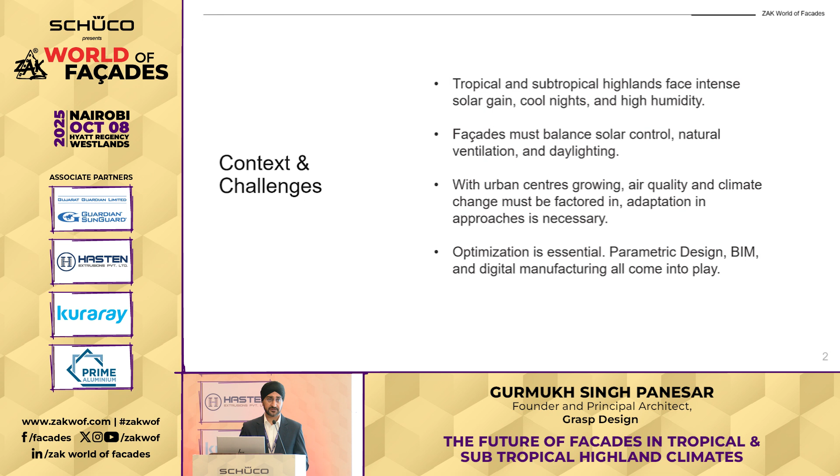In addition, climate change is another concern. We don't know what the impacts of that will be. Increased temperatures will mean some passive approaches may not work. We may need to introduce more active approaches, which contribute more towards climate change, so it's a vicious cycle. Lastly, optimization is essential - we need to use all the tools at our disposal: parametric design, BIM, and digital manufacturing to ensure we're doing efficient facade design.

Coming to self-shading forms and optimized shading geometry, let's go to the basics. If you're looking at a climate like Nairobi, you need your orientation east-west with your longer facades facing north and south. It's common sense - we're close to the equator, it works. In addition, you can introduce things like courtyards that provide some kind of self-shading, and these are some of the more basic principles that must be implemented.

Unfortunately, a lot of people don't implement this, and still have a lot of long facades facing west and east. Some of this is due to bad design, but some is also due to poor urban planning that has not really caught up or factored this in. A good example is on Westlands Road in Nairobi, just behind here - we have very linear plots, but the orientation is against what we're proposing, oriented along the north-south axis, and because of that you have longer facades facing east and west.

Now, because of some of these urban planning divisions in early years, I think this is now starting to affect high rises basically in the region.

Now, as you go more advanced in self-shading forms, you can have complex curvature that can be parametrically derived, and you can also have this in your fins as well. So optimization of sun shading devices, optimization of your brise soleil, and your fins as well.

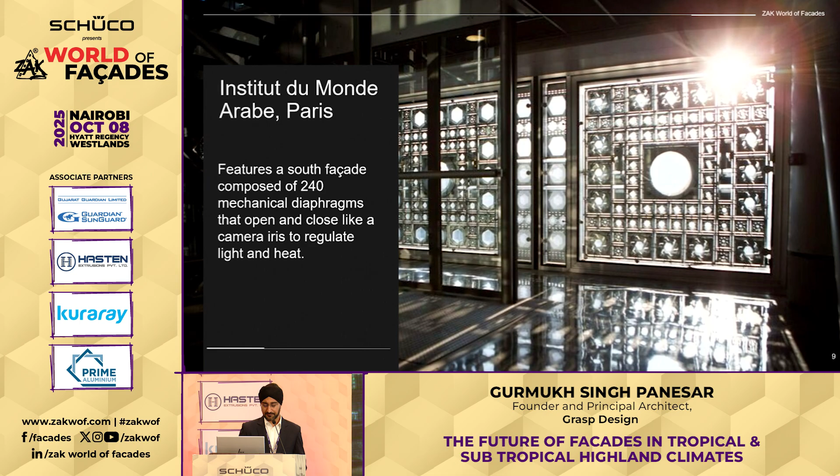Another example of dynamic systems is the Institut du Monde Arabe in Paris. This features an iris kind of approach, similar to what you have in digital cameras. If you see all the round apertures, they actually have an iris system that closes to let in light and regulate heat. This is a good example - there are two different systems. If you go back to the one in Al Bahr Towers, that's how it operates, with triangular kinds of open and closed settings in the facade.

The next item I'm covering is electrochromic and thermochromic glass. Between the two, I think electrochromic is more widely used. Thermochromic is quite niche. It's not used a lot for good reason, and I'll come back to that in a bit.

Basically, thermochromic glass tints based on ambient temperature, while electrochromic glass tints based on electrical charge. So it's a lot easier for you to control electrochromic glass than thermochromic glass. Also, thermochromic glass doesn't work very well for tropical climates. This is more suited for temperate regions, not for tropical climates.

The reason for this is because your ambient temperature tints the glass. If you had it in Nairobi, for instance, the glass would always be tinted because it's hitting 25, 26 degrees ambient temperature — your glass would always be in a tint state. And that would defeat the purpose.

However, in temperate regions, you have winter time where the ambient temperature is low, but you still want to let the sun in, and during summer you don't want to let the sun in either. So during winter, the glass tint is not on because the ambient temperature is low, but it still lets the sun in. During summer, the glass tints because the ambient temperature is higher, thus cutting out solar heat gain. So it works well for temperate regions. I wouldn't say it's very applicable for tropical regions.

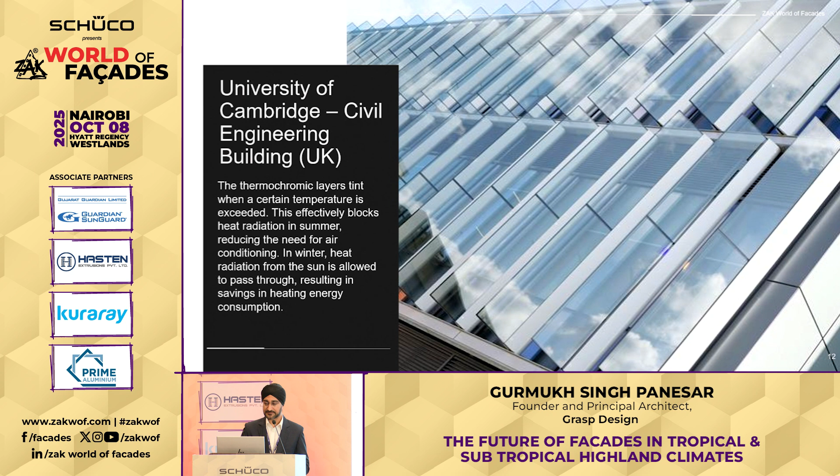Useful for temperate climates where you have winter and summer, but not so useful in tropical climates. So I want to also cover how we can integrate local context into this.

With the optimization of your facade items, your facade fins and brise soleil, you can integrate modern technology but with local craft, using locally derived materials like clay, timber, perforated metal, as much as possible, and obviously considering practical elements such as durability and UV exposure in this region being very high, you need to factor that in.

The other item I want to discuss is future outlook. What's next in terms of facade systems? You have things like algae-based facades, where your facades can generate energy. PV facades are already a thing, where you can have generation of power from your facades, with transparent or translucent photovoltaic panels on your facade, and AI-driven predictive facades with phase-changing materials.

That's obviously next level, but I think this covers what the future might look like, and I hope this has been useful. Again, for tropical regions such as ours, you have to be very careful about what to do in these facade implementation strategies. However, some key takeaways: start with the basics, get the orientation right, get your basic shading right, and then optimize further using design tools, parametric design, BIM, and you can use CNC fabrication as well to optimize material use. Thank you.

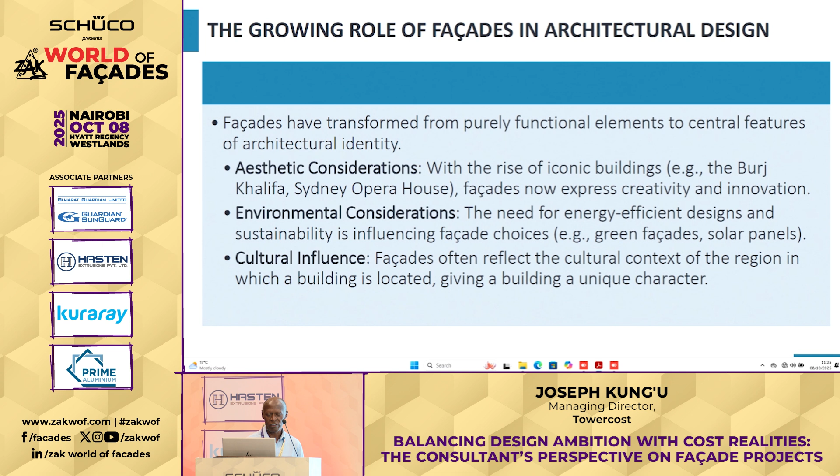When it comes to design, as Gurmukh mentioned, there are things like high-performance glass, smart facades, photovoltaic cells, thermochromic glass, and all these are part of the direction the evolving facade market is going. With that, aesthetic considerations come into place, environmental considerations become critical, and even cultural influence also becomes quite important in that regard.

When it comes to cost realities, you find that projects face intense pressures due to the increasing material cost.

We must be able to strike that balance, so that we make sure the developer, and even us as consultants, ensure the client is able to get value for what they're investing into. That's why material cost, whether aluminum, glass, or accessories, these are all important materials. You find that the capex involved in terms of imports and duties becomes quite prohibitive.

Recently there was also a duty introduced, which is making this kind of construction quite prohibitive. These are realities of the day that we need to see. How do we manage to give clients still a good product while being able to manage the costs associated with that?

It's a challenging environment, but I believe it's only those designers who are open to exploring other avenues who are going to be able to face these realities in a massive way.

Now, having said that, how do you balance the design ambition with the budget constraints? I believe that early stage decision-making becomes important.

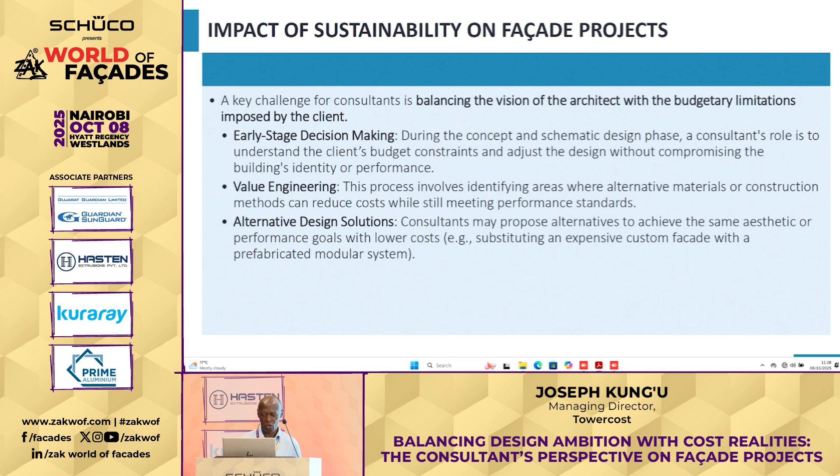How does that affect sustainability? That's why the element of design solutions and alternative solutions come into place, so we make sure the sustainability element is clearly addressed.

There is also a lot of green building technology coming into place. We have a few buildings right here in Nairobi whereby this kind of design has been carried out. It's becoming very attractive in terms of meeting sustainable requirements, but also improving the whole ecosystem and environmental element of the city.

These are technological innovations, whereby with advances in AI, robotics, and automation, it will lower the cost of custom facade systems and allow for more innovative designs at lower cost.

In terms of circular economy, we need to look at recycled and upcycled materials, which may become more common in facade systems as far as sustainability goals are concerned. The other element is collaborative approaches, whereby we increase collaboration to help manage both cost and design effectively.

So what are the takeaway points? Facades are both a design challenge and cost challenge in modern architecture. Technological innovation and sustainability are key drivers of both cost and design evolution. As consultants, we must be adept at balancing the client's budget with the architect's design vision, while also considering long-term performance and operational cost. And that is the end of my presentation.

Maybe I'll open it up in case there's any question someone might have in terms of how we can balance the cost and the design.

Any question? I think we'll do the Q&A at the networking lunch. Okay, thank you. Thanks. Okay.

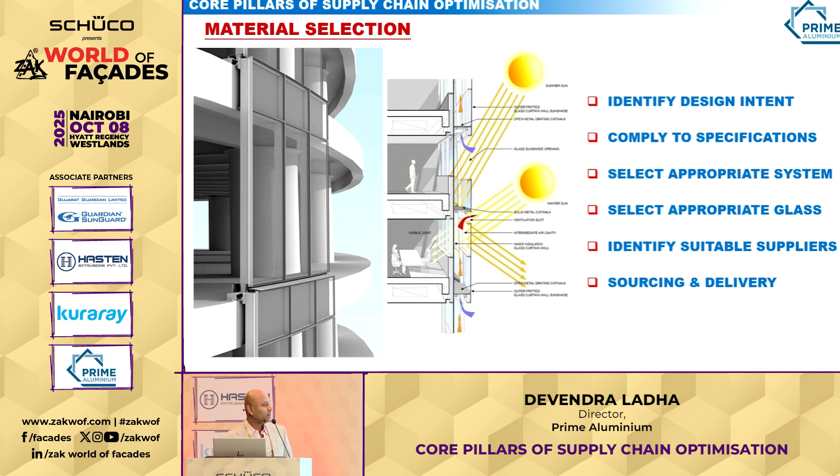So as you can see, for a facade project, there are so many different products and components involved that everything has to be sourced from all over the world. This is a typical example of the type of suppliers we work with and where they're globally based, and everything has to come together at the same time, and we have to be able to make sure that the right products are coming to the right quality, and they arrive to Kenya and East Africa, so we can do the installation for that. So this is a case study for Britam Tower.

We were the facade contractor for Britam Tower, which we handed over in 2018. And it was a complicated project. So we had to first understand the facade concept. So this is the facade concept. So what you have over here is you've got a facade which is a double skin facade.

So this is the concrete slab over here. And then there's a catwalk, it's a floor-to-floor glazing. And there's terracotta rain screen on the outside. So this is the floor-to-floor glazing, the openable vents, the maintenance platform, the terracotta rain screen, and the permanent ventilation. Now these are many, many different components coming together at the same time.

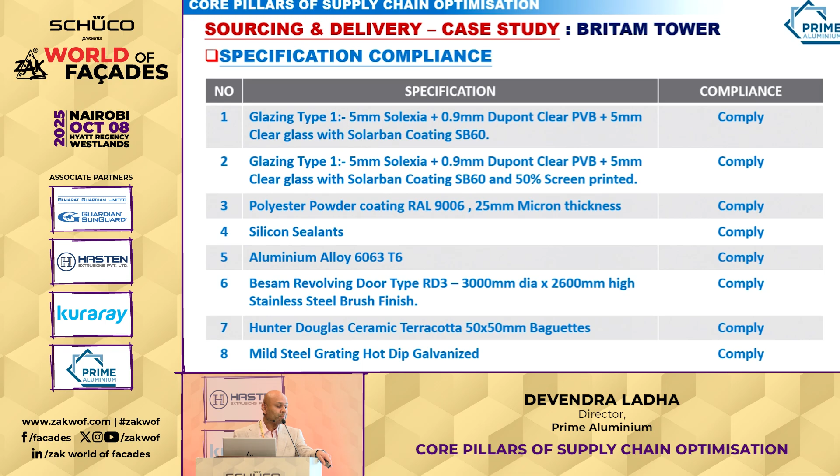And we also have to comply to the specifications. So there was the specifications that were set out by the facade specifier, certain type of glazing, certain type of powder coating, certain type of alloy and the temper, and the terracotta rain screen was a Hunter Douglas product. There was also grating, which was a catwalk. And what we have to do is we have to comply to the specification. At the same time, the facade had a performance requirement.

There was air infiltration, water penetration, wind resistance - all these performance requirements. So we have to make sure we select a system that complies with all of this, and we have to identify the right suppliers.

The project overview had curtain walling, so we identified the system supplier for the curtain wall part. You've got the doors and windows in the facade, so we identified the system supplier, and the steel work - in our factory we made all the steel work, I-beams, and because it's a secondary facade there's a catwalk. Then there's terracotta, so we worked with the Hunter Douglas product for that.

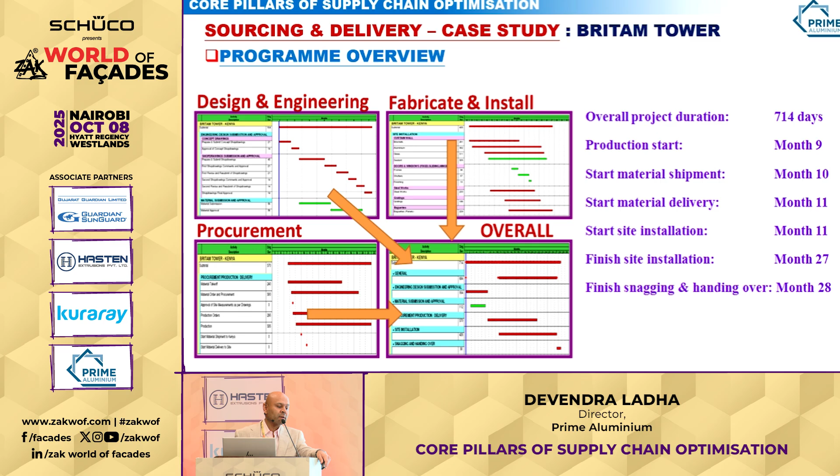All of these items then have to come into the overall program. There's a design and engineering element, a procurement element, a fabrication element - all of those come into the overall program, and we have to make sure the sequence of procuring all these items comes at the right time and the right interval so we can do the facade installation.

In the end, once the project was executed, we got a very beautiful facade. That landmark project has to withstand the wind loads and everything, and we identified the right systems to comply with the requirements.

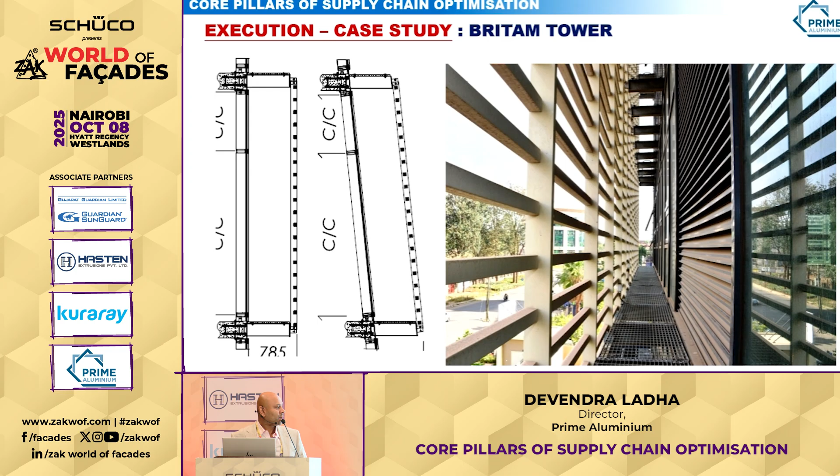What makes a high performance facade? What are the key characteristics? I'm from the facade contracting background, so I'll give my perspective on what I consider to be the key characteristics of a high performance facade.

I would say it should be energy efficient, with high energy efficiency, durable to weather resistance, provide indoor thermal comfort for the occupant, structural durability, and has to be sustainable obviously. In Nairobi we now do have a problem where facades and windows need to be acoustically well designed because noise is becoming a problem in Nairobi, and obviously they have to be aesthetically appealing.

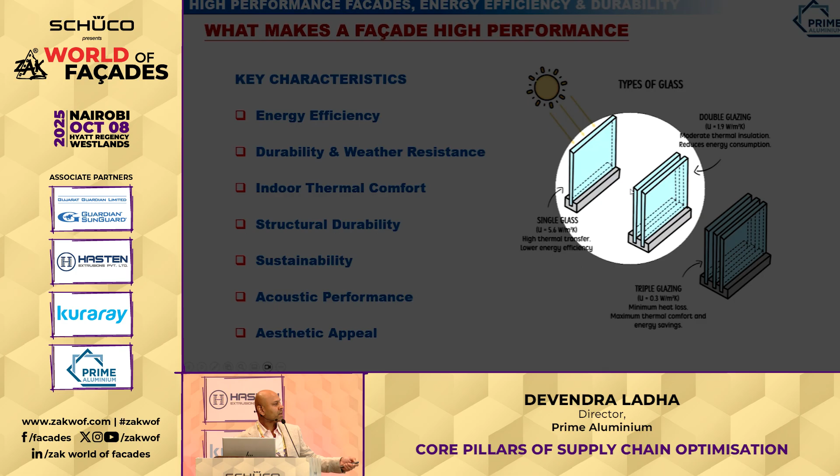Also for energy efficiency, there are various ways of doing it, but the most simplistic way is - you've got the outside sunlight coming into the building, so you can use single glass, or double glazing which is two layers of glass, or not so common in our market, for extreme climates you've got triple glazing as well. Generally in Nairobi, between single and double glazing, most projects are based on this type of glazing selection.

Then also the right system, a durable system, has to be selected in terms of performance, in terms of the hardwares, and making sure the right components are used to ensure long-term durability and functionality.

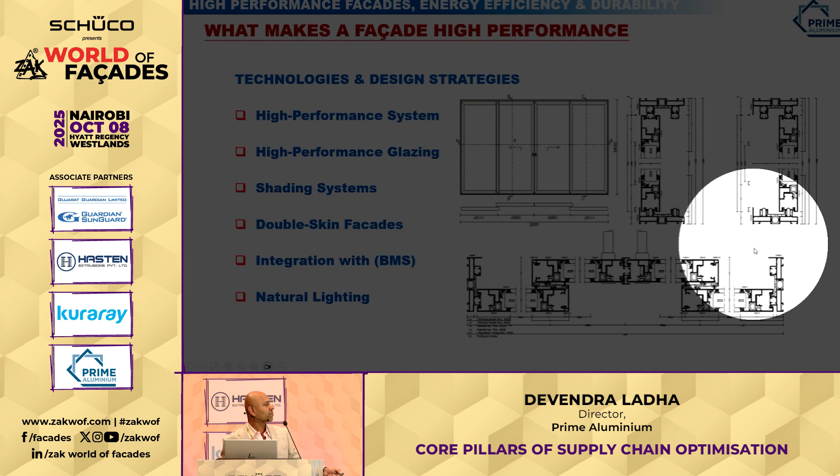Another thing is selecting high-performance systems. So this is the sliding door - I think this is a Schüco sliding door for a project that we did. You've got the larger width and height, and we selected a system that can have smooth operation for that. So this is a 4-panel sliding door, and this is a cross-section diagram for that.

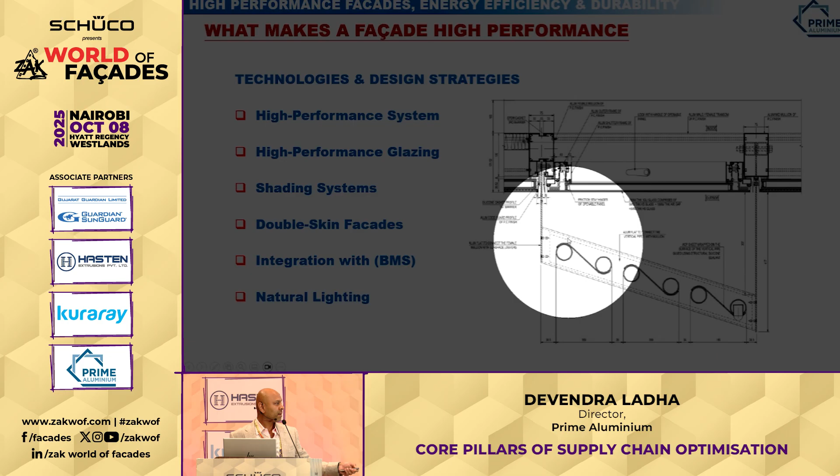These are the 3D analysis for that project, and this is the typical detail. What we've got is a unitized curtain wall system with sun shading cantilevered from the end of the curtain wall mullion, sticking out like this. In this slide, you can see how it projects out, giving higher performance to the facade as well as aesthetic appeal.

Another way to make the facade high performance is using good natural lighting. You can see in this project there's very good natural lighting coming into the building. Being in Nairobi, on the equator, making use of natural light is very good to do.

Now the next topic I was talking about was price versus performance and striking the right balance. One thing we've struggled with - and I'm happy QS Kungu said the days of doing square meter pricing have gone, I was going to give a round of applause at that point - is that nowadays we've got software that can build your facade.

These softwares calculate the amount of material required, and from the software you get all your material lists. You can play around with different types of systems, connections, fabrication data, and you've also got CNC machines that connect to the software to give you proper fabrication.

What these softwares let you do is build your own facade onto the system, and from that you can play around with the pricing. You can see here, you've got a facade that is X by Y in width and height. You've got the same one, but here you've got two openable panels and a double hinge door below.

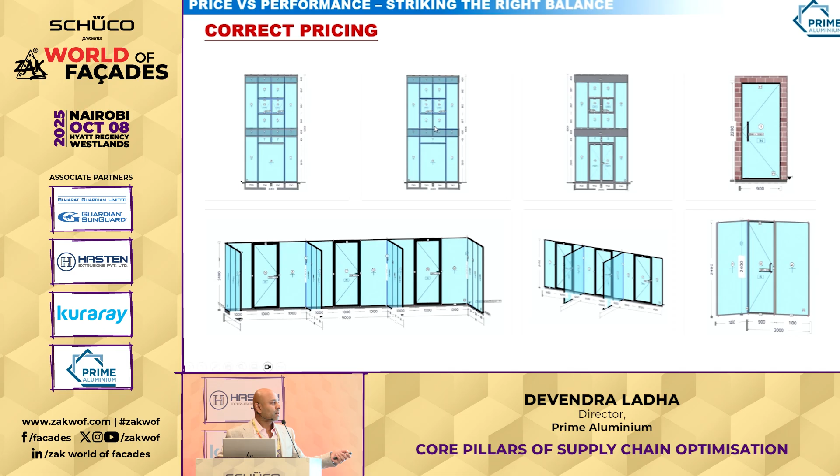One mistake that's been happening in the East African market is pricing by square meter - if you go on a square meter basis, it will be the same price. But because there's a hinge door, the price has to increase logically, since there's more hardware going in. Using these softwares to build facade systems and price the estimation correctly is the right way of doing it.

This is an example of the Schüco system, where for instance you've got a casement window or a sliding window. If you go to Schüco and want a casement window, they have 8 or 9 different options. All these different systems are of a different category, and all of them are priced differently.

When it comes to project specification, if you're working with Schüco, the system has to be selected and then priced accordingly. This is a good platform for architects and cost managers in this audience to connect with Schüco and see the different systems available, and the difference in quality and performance. So that's how the software works - we use it to price correctly.

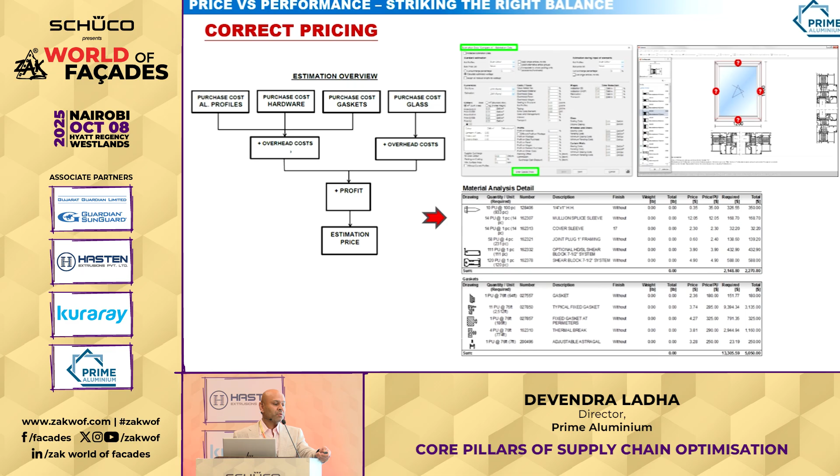We do an estimation - we take the purchase price of the aluminium, the purchase cost of the hardware, the gaskets and the glass. It goes into the overhead costs and the estimation price, which you feed into the user interface. You build the window on the software, as per the previous elevation I was showing, and it does a material analysis like this. All the prices come out, and you get pricing based on that - that's the correct way of pricing.

Now the next thing I was going to talk about was key stakeholders and their roles in a project. Every construction project has the owner, the consultants, the construction workers, and the contractors. We are a facade contractor - we fall in this category as a subcontractor.

So I wanted to explain the key stakeholders we work with in this position. First of all, there's a system supplier - a right system has to be selected. For example, Schüco is here, they're a system supplier.

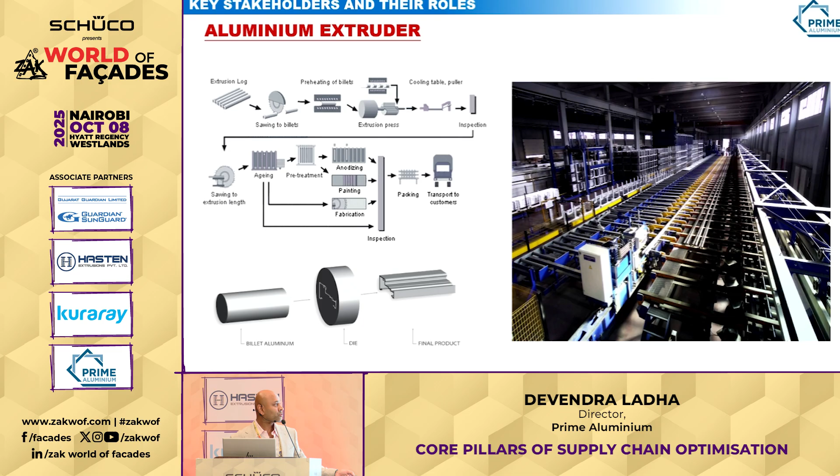Architects can approach Schüco and say, okay, which system do you want, sliding system, folding system? They will provide you with the hardware, the aluminum, the certification, the testing. Also, if there's a specific type of handles, they will be able to offer that. And then the next item is the aluminum extruder.

The aluminum extruder has a setup like this. The raw aluminum comes in, gets cut, goes into the extrusion process, the painting process, the anodizing process. So basically the raw aluminum goes through a die and out comes the aluminum. That's the extrusion process.

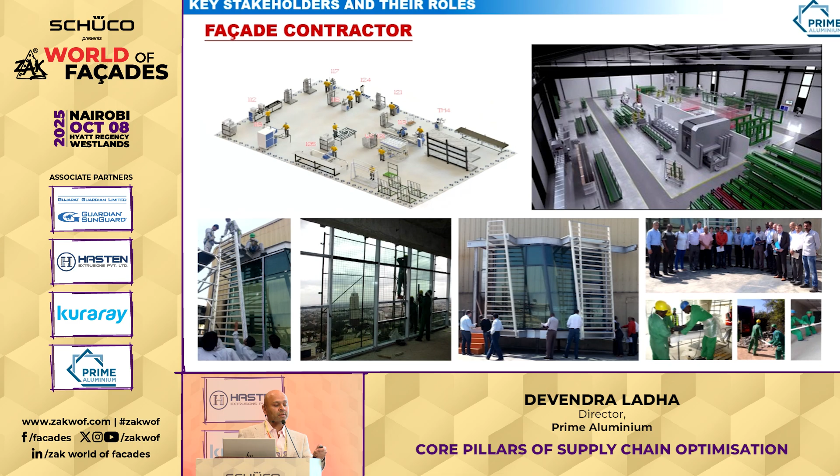That glass then goes to the glass processing companies, so the cutting, the laminating, the double glazing happens at this stage. Then finally comes the facade contractor, which is where Prime Aluminium comes into the picture. A typical facade contractor will have a factory setup with different machinery like this. This is a very modern factory, probably not in Kenya, but I'm sure it's somewhere else. Then we do the fabrication, take the material to site, do the installation, and that's basically what the facade contractor does.

So the facade contractor, from the whole collective stakeholder group, we are the ones who do the dirty work. And that's where we come in. Thank you.

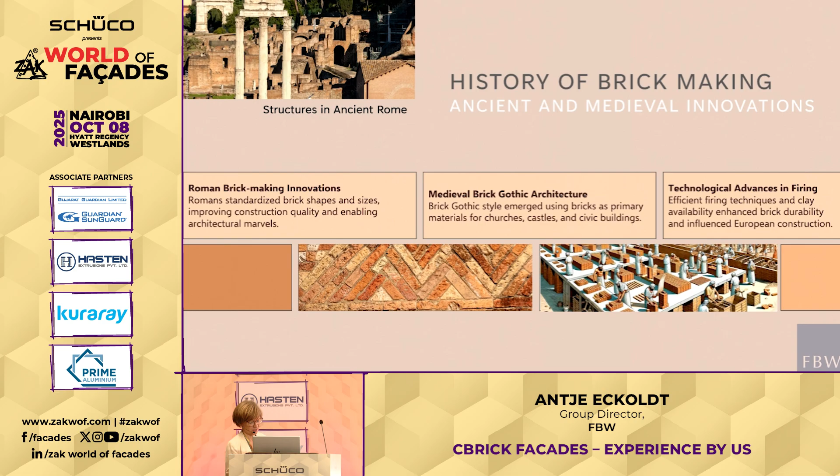So as you can see in the bottom picture, they also created a very distinct workflow just because of this huge demand for brick needed for their full empire. Medieval Gothic brick architecture brings the brick to the forefront, so for the first time bricks are actually being used as the facade. And obviously through time the process was improved and the quality was improved.

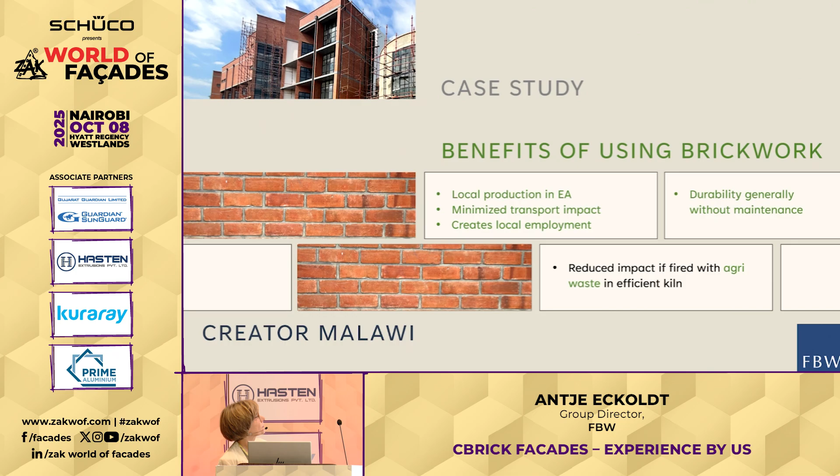So the facade we created — a bit of background — the project was originally designed in the UK, and the client is the Wellcome Trust from Liverpool. This is a medical research facility. As much as in Europe brick facades on multi-story buildings are commonplace, they are not as much in East Africa, so we had to translate the requirements of stability, durability, and structural integrity with a local contractor and locally supplied material.

So why did we choose, in this case, a double skin facade with a cavity? It's actually better practice to have a double skin on your brick because it allows the brick to dry out faster, and the bloom you can sometimes get on the surface is reduced because the facade dries out and is more ventilated.

As much as we specified all the products you can get in the UK — all the anchors, wall ties, the shelf angle — the contractor chose to go their own way, and down there you can see the wall ties and shelf angle they created. It's been interesting, but to summarize our experience, it's good to say we had already designed in the supports at each level.

So it was making a lot of sense to include in the master plan that we will create employment through a material which can be found on site and which will then develop the hill and actually be in line with the pillars I've just explained.

So circularity, I think everybody talks about it. Brick is really a circular material. You start with the manufacturing, you obviously use it in construction, then as you disassemble it, it will then afterwards either be reused or it returns to soil, and then the whole circle starts again. So there is no real waste product, anything which is not natural.

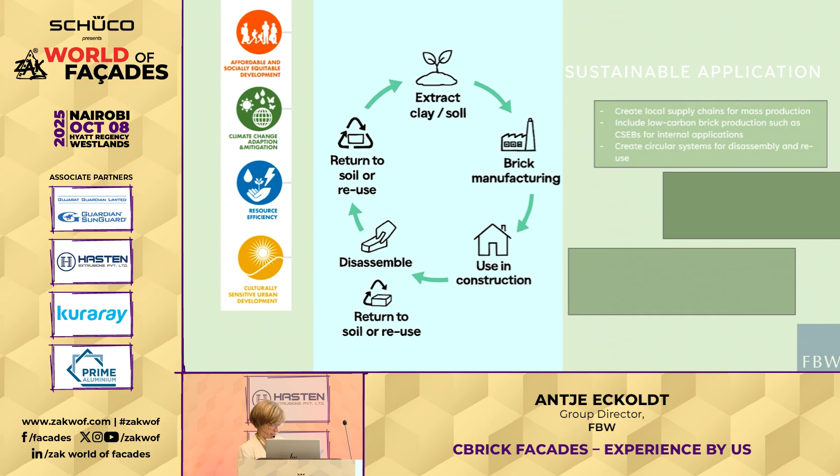And this one solution we looked at would be to just look at compressed earth blocks as well as another material, maybe use it on the inside, or look at alternative ways to make bricks. So then we came across this interesting product, Oxara. Maybe we should invite them next time to talk as well. So this is an innovation created in Switzerland.

We're taking demolition waste and clay, and they're producing low carbon binders. Normally in compressed earth blocks, when you don't have so much clay in your soil, you actually need to use a lot of cement. This creates a block, or a tile, which looks more or less like concrete or clay, depending on the pigmentation. But it's completely sustainable and cement-free. That means 70% less CO2 per cubic meter of building material.

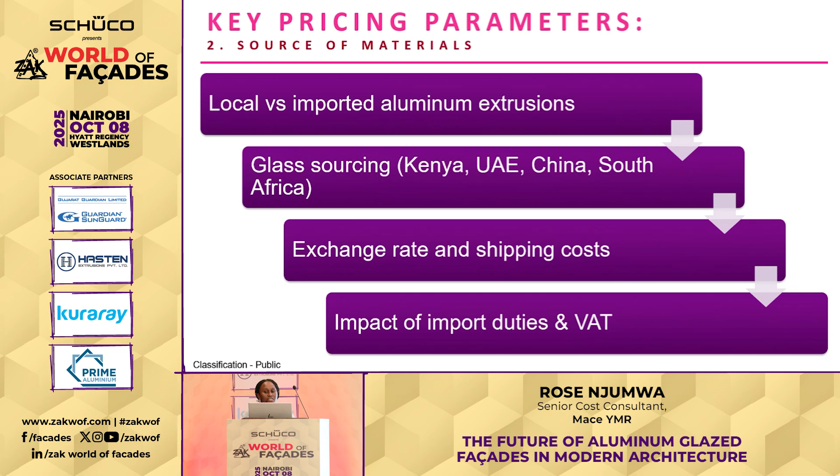The second thing that we consider is the source of materials. We have locally available materials, and we have materials that are imported. So for the particular project that you're working on, where do you intend to source the materials? If you're going to source, say, from UAE or China or South Africa, wherever it is, you need to know what are the exchange rates, what are the shipping costs, what are the import duties, the VAT, because all these things will impact the final cost of the product. So it's very important to know where you are sourcing your materials.

The third thing is the fabrication and project factors. Again, we consider the complexity of the facade geometry. You find there are buildings which are very regular shaped, and so there's not much cutting and wastage. But if your design is irregular shaped or has some interesting shapes, then you'll have more cutting and therefore more wastage and therefore higher cost. So it's just something you need to factor in when pricing.

Again, we look at the site logistics. Will you need scaffolding for your project? How high will it be? Or do you need a crane? Do you have access to site for the crane? So all these things, again, they build up the cost.

We also look at the labor skill level. For an aluminum facade system, not everyone can do the installation, not everyone can do the fabrication. So you need to have someone that is very skilled. And of course, the better the skill, the faster the installation, and definitely the higher the cost you will have to pay for that.

So the other thing we look at is the location of the project. Where is the project located? Is it a humid area or a highland area? Different locations will need different materials and therefore different prices.

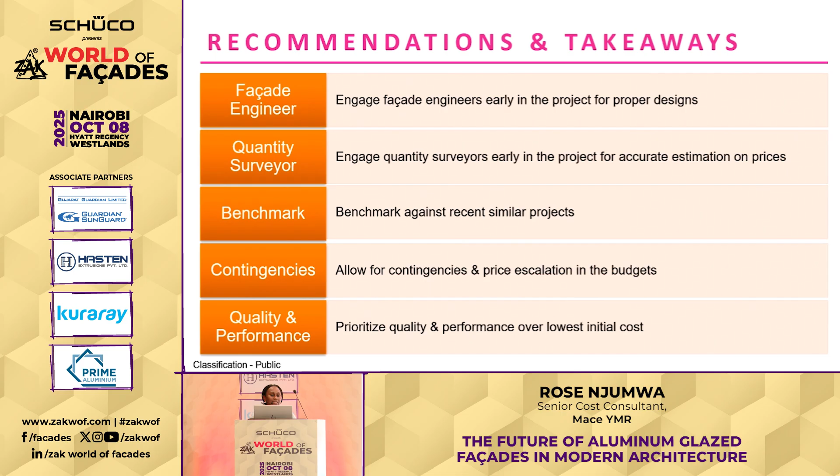So I hope with that short presentation I have been able to highlight some of the things we quantity surveyors consider when pricing. Hopefully moving forward we can get better designs from architects and engineers, so that when we go to the market we know the specifications and systems we are looking at, and that will help us get the right prices from the market. Thank you very much for listening.

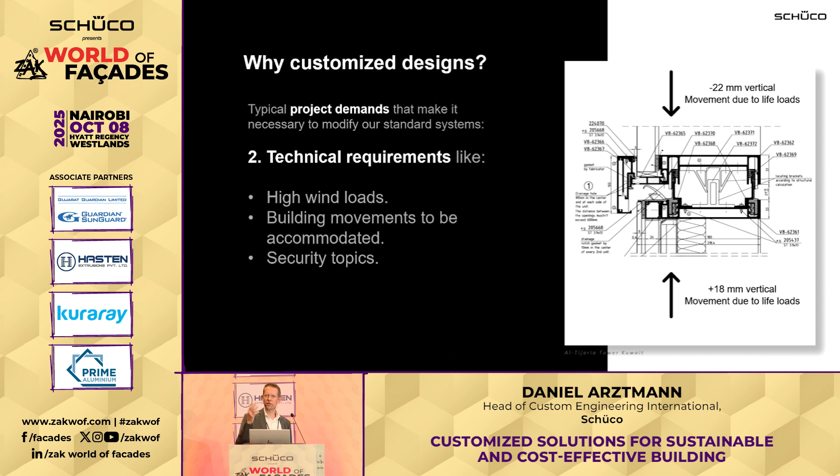Then consider facades like that - that's a standard unitized facade. But what you can see there is a huge gap between the different units, to accommodate huge building movement. That's just one example of that.

Also, Schüco in the past mainly worked for European countries, but in the last 10 years, I would say, we always go more and more to special markets where, for example, it might be necessary to do value engineering. For example, we did that for some Indian projects, where you have to comply with the local standards, and these are also very cost-sensitive markets. You might also face this issue in Africa. Then we take our standard systems and bring that down to what you need - a very cost-effective design, but still complying with the requirements relevant for the specific project. This is what we do very much at the moment for our international markets.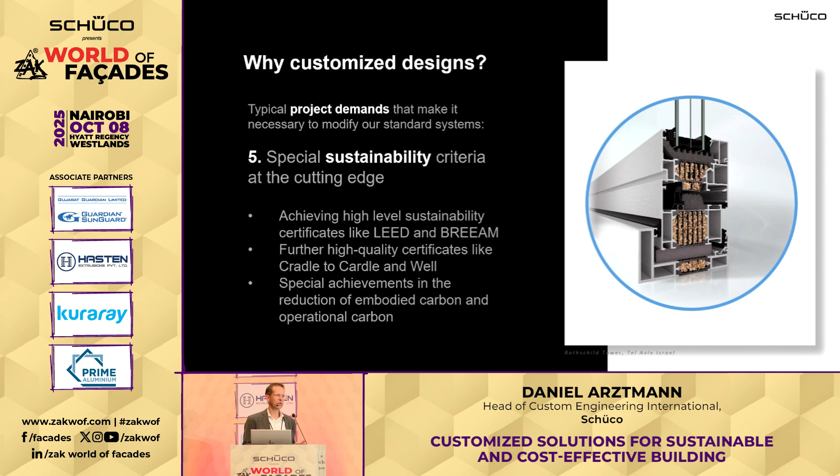And the last project-specific demand that brings projects to us, which I also want to highlight today, is the topic of sustainability. It's a very prominent topic at the moment, and Schüco takes very much care of that. Especially in our department, we help investors and clients, for example, when they want to achieve high sustainability ratings, with programs like LEED and BREEAM. We also have projects that were certified with the cradle-to-cradle certificate, or also the well-being certificate. The main aim with that is bringing down the carbon emissions of the building and the facades. But I will show you an example of that also later.

In general, we can say with this large number of engineers, we work on a lot of projects. In 2024, for example, we worked on 350 successfully completed projects in 40 different countries all over the world. And we are not just working on facades - facades is our main topic, most of them unitized facades, but we also work on stick constructions. We design special sliding systems, window solutions, door solutions, and so on.

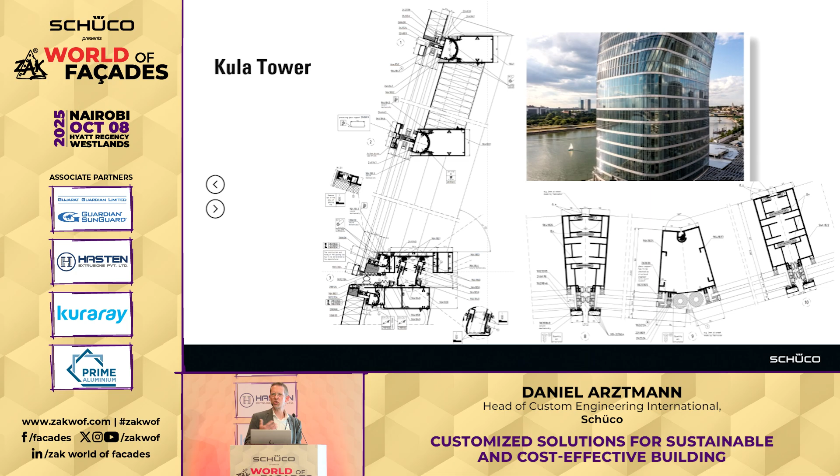But where you have to be sure with that is you also need a good partner, a good fabricator for that, because unitized facade is also a bit more advanced than a stick construction.

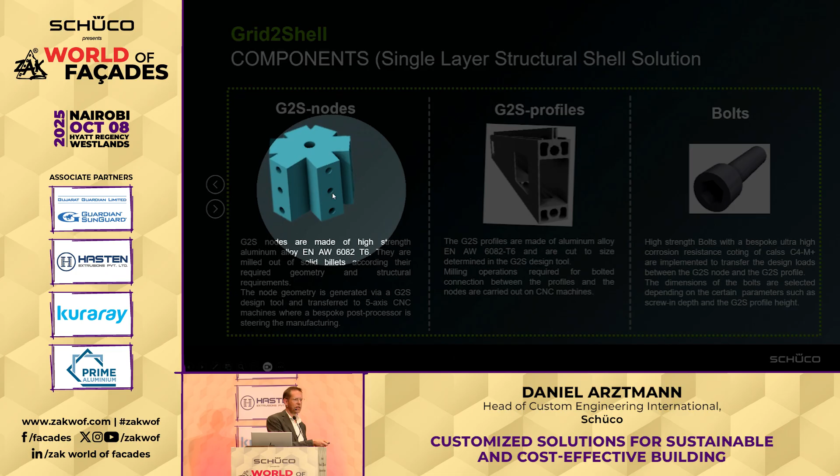When you look at that slide, it looks like not such a difficult project, because you don't have too many articles to consider. The main things: you have here a node in the middle of the construction, then you have the main profiles, which are nearly always the same throughout the whole construction, and then you have some specific bolts that you need to combine these profiles with these node points.

You build that together in several steps. First, you connect the node points to the profiles. Then you use the bolts to screw everything together. Then there's a gasket principle, specific gasket pieces that you put on top of that. Then comes the glazing support, then you install the glazing, and finally the only thing left is to seal all the gaps very carefully.

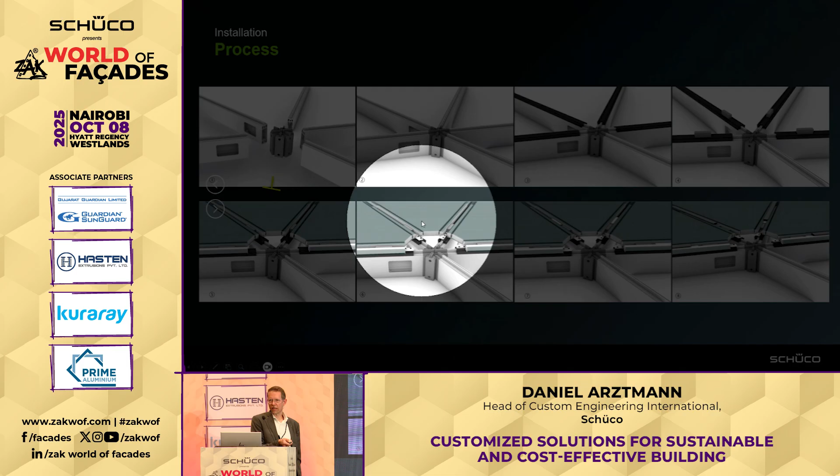Finally, a node point looks like that. What you see here quite well is the drainage principle that we're using. You have these adapters to fix the glass, and these are also necessary to adjust to the different geometries.

You use standard profiles, and these profiles are all normal profiles. The main issue is always the nodes, that's where the know-how is. For the production of the nodes, you really need a very good 3D model, and then you can design the nodes especially for the needs of your project.

What's important is that Grid2Shell is not a product like a stick construction where you can just assemble everything on site. What you do is assemble everything at the ground, and then lift that up. You can do that in different parts, and then connect the parts on site. I'll show you a short movie of a production in a few seconds, and then you'll see much better how this is done.

Here you see how this looks on the building site when the parts get delivered. You can see the different node points and the aluminum profiles, and the rest shows how the facade is constructed. You first construct the primary structure, the grid shell, and then the glazing is done once the grid is already installed.

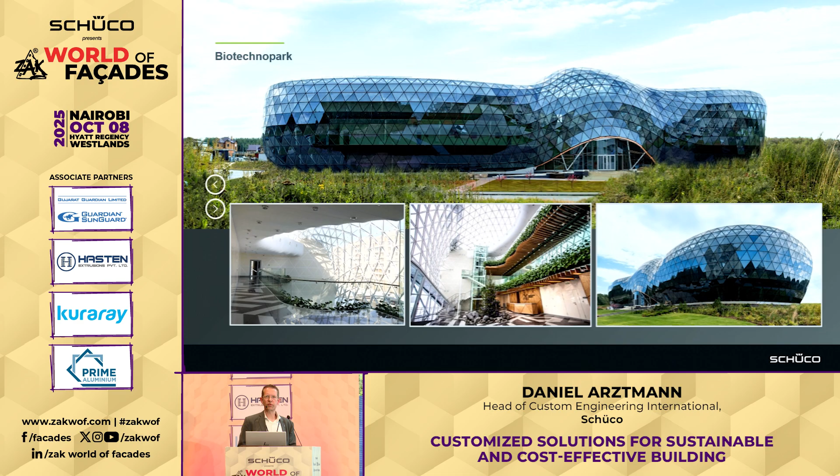At the end of my presentation, I want to show you something. I highlighted also this topic of sustainability, and this is what we took care very much about. We already dealt with this topic for 10 years, but we increased our focus on this topic in the last 5 years, I would say.

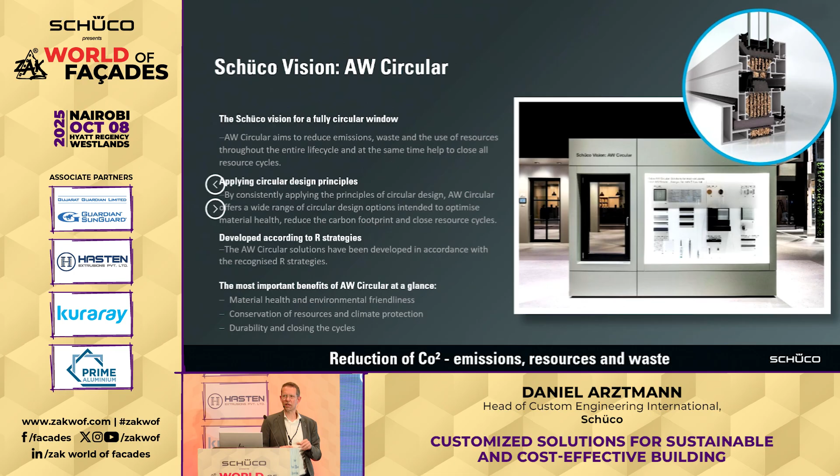We are meanwhile at a stage where in January we said, okay, that's something really for the future. You cannot order this with us yet. At the building exhibition in Munich, we had very interesting requests for that. And for special projects, we are now nearly at the stage where we can provide most of these things that you see here on that slide.

Okay, this is what I wanted to show you today. Thanks for your attention, and I'm looking forward to fruitful conversations with you in the break. Thank you very much.

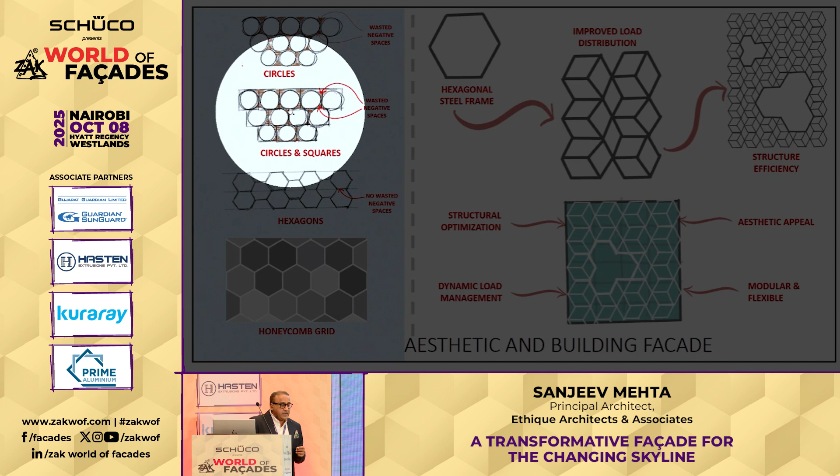So we started with the thought process of first a circle, and then we came to a conclusion that when we create a circle thing, there's a lot of gap in between. Then slowly we developed the other function, and came to the hexagonal structure. Ultimately we bound the whole complex together in such a way that it gives a honeycomb structure which is integrated, and looks like one single mass of a structure.

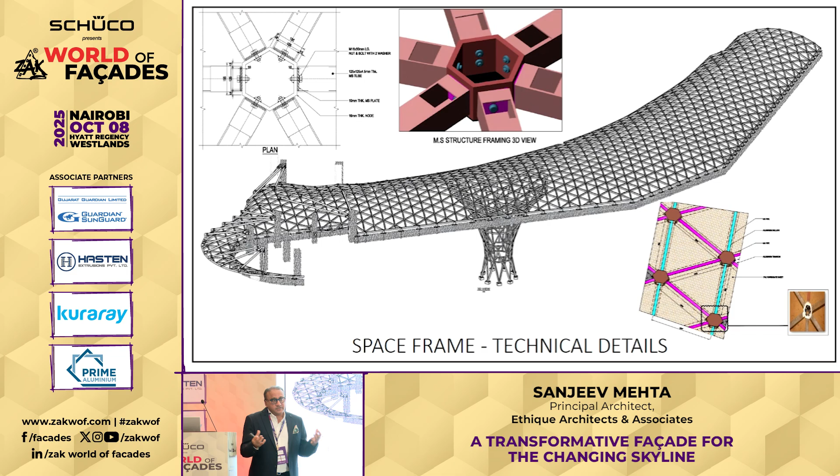This is the parametric node of architecture which we tried to create for the space frame in the center. Here we gave all the joints a nut-bolt system, like in the previous presentation. So there's a lot of room for expansion and contraction of the structure without formation of any crack anywhere.

So these are some of the rendered images of what's actually at the site, and this is the tree which gives the most strength to the structure.

So this was the design aesthetic of the overall project, combining and forming one function together. These are some of the renders, and what you see here is an actual photograph of what is already completed, matching what was shown.

And this is the night vision, which really highlights and gives impact to the structure.

On the right side is what was executed, and on the left side is what was proposed. So basically we tried to follow form and function, and that's why we created the whole mass to look like one, but with 6 different entities and different functions within it.

Now for the second project, I would invite Deep, my colleague.

This is also a commercial structure with mixed-use development, but completely done in parametric architecture. So this was the project, a commercial building designed on a quite tight plot, around 4,000 square meters. The building is around 140 meters tall, currently under construction.

So if I tell you the basic zoning, we have parking floors on the lower levels, and around 25 commercial office floors on top.

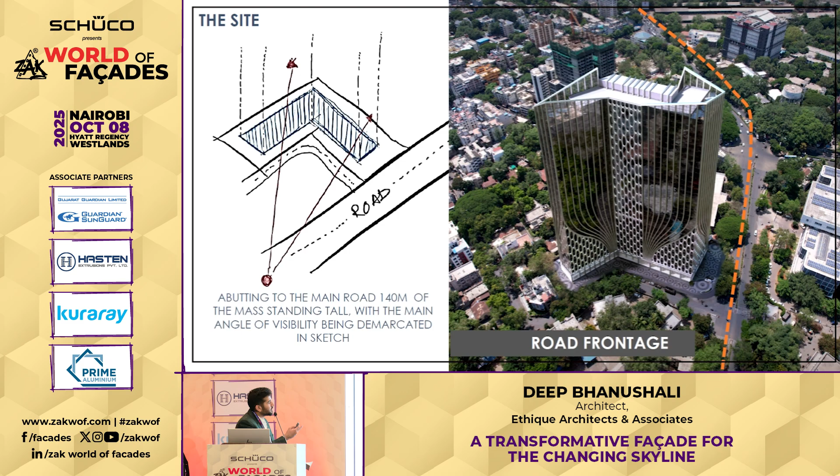Usually when we design an elevation, specifically for a high-rise building, it is always divided into 3 parts: the eye level experience, the central mass, and the crowning of the building.

So when we were developing the form, as the plot was in an L shape, when you see it from the road, you see two facades which were visible. So we developed a concept of a wing, where the building is designed in the shape of a wing.

And when we see the lower part, we followed some elliptical jalis which were made in aluminum, and the backdrop you see was done in louvers which were darker in shade, so your front aluminum parts light up.

This was the second project, the Alturia Towers, designed on a concept of biophilic architecture. It's a 180-meter tall tower currently under construction. When developing the mass, we decided the building goes in a tapering form at the top, and each office has a terrace in front. Since it's designed in Pune, India, where temperatures are quite hot, we provided balconies wrapping around the office spaces, which avoids direct light hitting the facade. The facade was also designed so you have a green balcony, giving a good view in front of each desk.

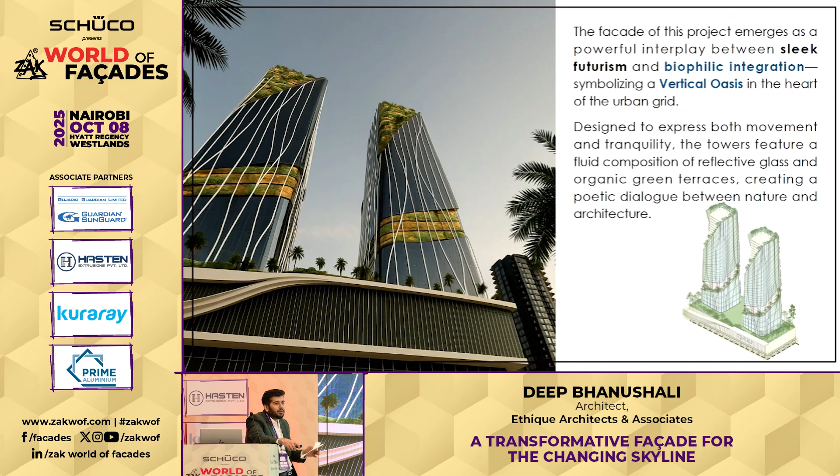If we see the overall form of the building, the aluminum fins were inspired from the branches of a leaf wrapping around the building. This was the final output, what we are currently constructing on the site.

These are the three commercial projects we are doing in India. Every project has its own different story, so whenever we design, it's always a different concept, never a repetition from one to the other. This project we completed in Nairobi is in a neoclassical style, done in proper proportion with three different concepts of the elevation.

When we got this project, the plot was triangular, with a road on one side and a pretty decent green area view on the other. We first designed the whole mass taking the roadside structure, but realized the view on the rear side was getting minimized. So we took two kinds of structures together and combined them with a central axis. The plan we designed formed a clear neoclassical style elevation in a nice curvature formation, giving a lot of impact when a person is traveling from the road, with a lot of foreground created by pushing the whole structure behind.

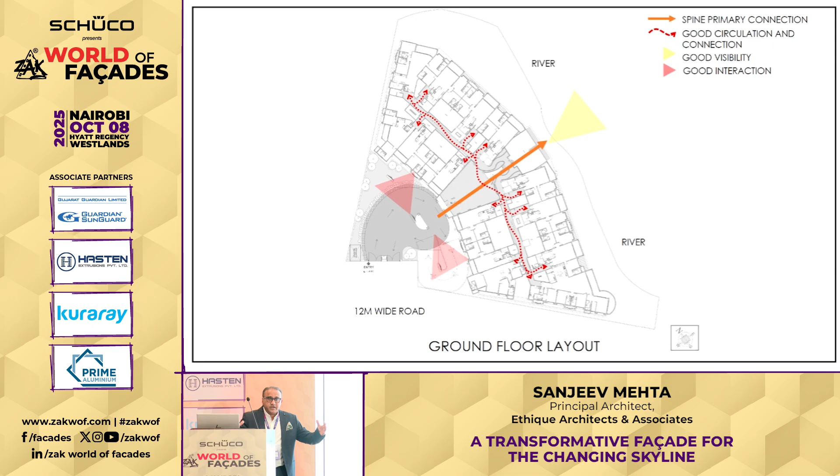It's designed in a proper central axis so the wind movement is clear in the central corridor area. This building facade was again designed with the same concept of three different parts: when you see it from eye level, that's one level; then it becomes the center mass; and then the crowning feature where the overall mass is seen.

The whole building and project has been pushed behind by 80 feet so the front part has much more impact and the elevation looks more grandeur. These are the final formations of the elevational design with a central pediment feature, entablature, nice fluting, then piers and pediment, created in proper classical style.

A beautiful entrance porch was created with proper proportions of grills and patterns in the center, with a central atrium height of almost 45 feet. These are actual rendered photographs on the terrace, all the amenities we have created. This is an actual photograph of what we have done and what it looks like right now, and on the right side is a rendered image while the left side is an actual facade.

The overall proportion and mass, what we try and create in every project, not only in classical projects but every project, is one of its kind with its own different story. This project was completed in Nairobi - it's 3 towers on a nice rectangular plot, again with the feasibility study of wind blocking and all that.

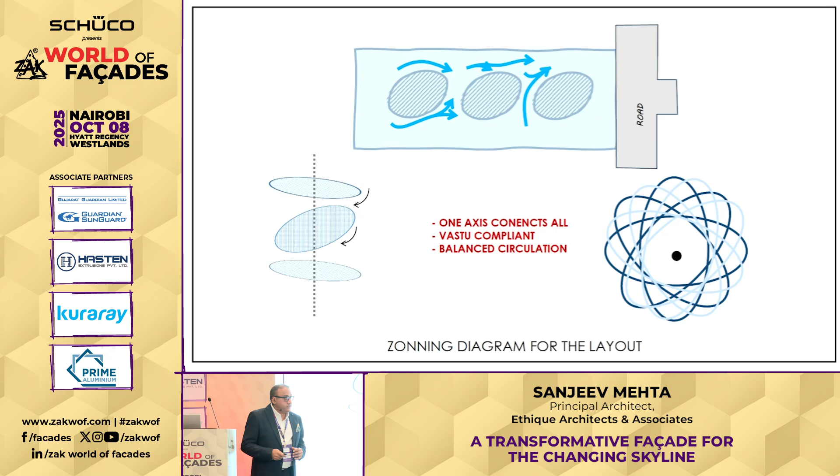The concept was forming a nice proper axis with balanced circulation taken from the center part. This is the final overall layout with the 3 oval structures, all facing different views from the back and front, and practically all rooms are cross ventilated.

This was the basic concept and thought process of the planning. It was a nice rectangular plot with a contour and steep development. This is the overall project massing we were able to achieve, and then we broke it into different layers for the parking statements.

Then we connected the 3 towers separately in this way, and ultimately arrived at a different oval form. This is the final outcome of the product we designed, already completed here in Nairobi. These are some of the renders.

On the terrace we have given maximum activities, as well as on the lower floor podium - all the activities have been taken care of.

Now this is a very interesting project we are doing at Karen in Nairobi. This is a 400-bedroom service apartment, probably going to be the largest development of its kind in Nairobi, which Deep will explain. It consists of shopping, a huge banquet hall, and service apartments.

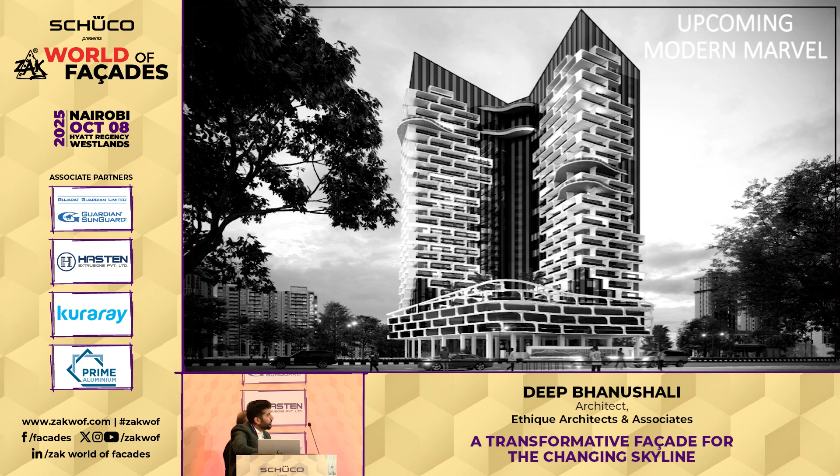This is a mixed-use building currently underway in Nairobi. It has around 400 rooms of serviced apartments plus hotel rooms, with banqueting spaces on the lower floors and some shopping spaces on the ground floors.

This was also designed on quite a crunched plot, and currently the overall height of the building is around 140 meters.

So it was a similar concept to what we discussed earlier when designing a high-rise building - the lower part, middle part, and the crowning top part are designed in equally proportioned ways. When designing this facade, it was basically a mixture of squares arranged in asymmetrical form.

We broke this form with some curvilinear terraces at regular intervals, and to highlight the white boxes you see in the elevation, we had a backdrop of black glass for the hotel rooms, and this was the drop-off area for the hotel and other things.

So these are some of the projects we've displayed today, and every project, as you can see, is more versatile in nature. We definitely believe in form follows function, and that's why every project's plan and development has a different thought process and story behind it, but aesthetics also play an equal role.

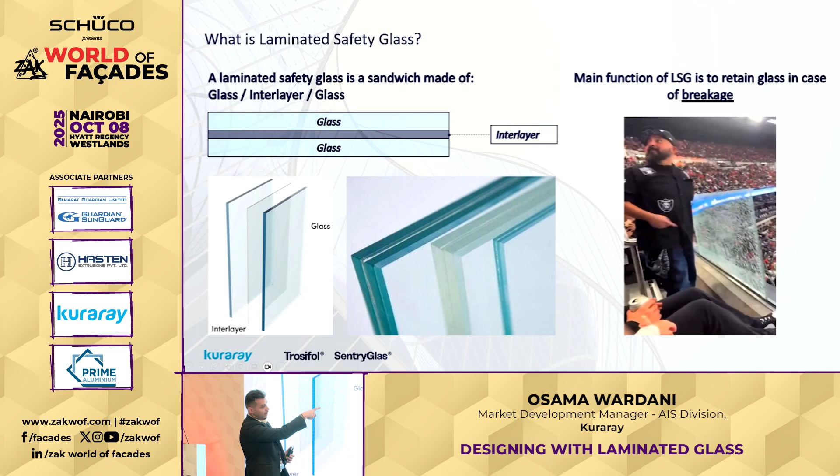Why is it important? Because in some situations, as you can see here, there was a very excited fan in a very full stadium who probably was wearing a ring and broke the glass. I could imagine a different scenario if there was no laminated glass, or this particular interlayer, which we'll discuss more. It could have ended without that smile - I think you've seen him smile, but it could have really ended in a not very good way.

So our portfolio fits all your needs. Basically, these interlayers can help in many areas to give your glass better performance. But again, the standard one is always safety, the glass retention in case there was a breakage in the glass. What else can you do with that?

You can also get some decorative advantage from it, because it comes in different colors - it can be green, blue, or whatever. There are some special colors, a 100% opaque range. We have a stand over there, feel free to go check them out.

These interlayers can also help increase your noise insulation level, giving you a higher RW and STC. Also, if we think about the structural and security part, the glass, because of that structural interlayer, can behave as a structural element now. Again, it's not just the interlayer, it's all of you amazing engineers who know how to use it.

But because of the interlayer, it can help push in that direction. Some specialized applications include UV control and bird-friendly glass. When it comes to security, there's ballistics, bullet-resistant, blast-resistant, or anti-intrusion applications.

Our biggest segment is actually automotive windshields and side windows. Again, when it comes to sustainability, we have Trosifol R3, which is a PVB that has the lowest carbon footprint. According to us and many other competitors, we have the lowest.

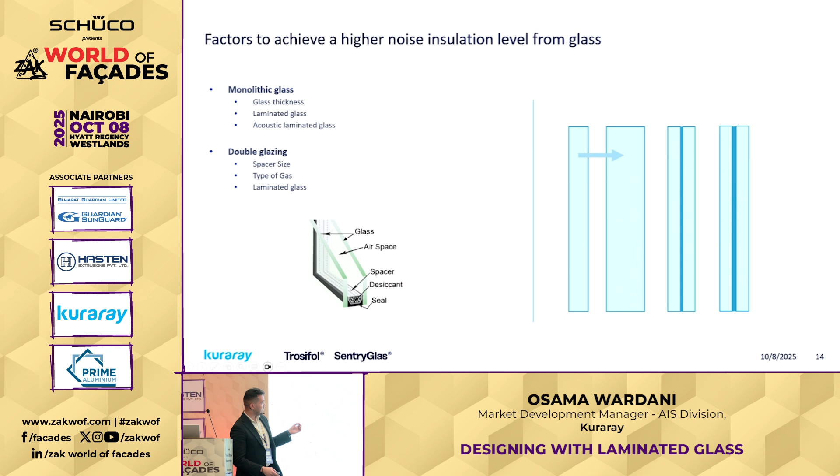Now, when it comes to double glazing, it's basically all of the above, because you can laminate either side. And then also the spacer size and the type of gas or air they put inside matters. We have two solutions for that.

We call them the monolayer sound control and the multi-layer. The only difference is what we would recommend to use as an outer panel. The monolayer is one homogeneous material, while the multi-layer is a collection of 3 interlayers, and it can be mixed with other colored PVBs to give some decorative advantage as well.

SentryGlas is structural, so it's a bit stiff, so it doesn't help as much. But if you use a specialized acoustic interlayer, it gives about 41 dB. So you have 5 dB extra just with the exact same glass thickness.

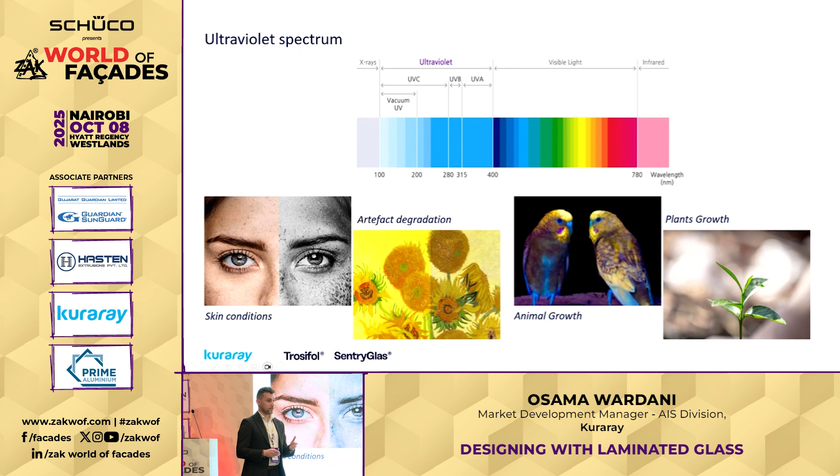When it comes to UV control, the UV spectrum is between 100 and 400 nanometers. Again, UV in general is always thought of as a bad thing, but in reality it's not. Yes, it does affect some skin conditions and cause degradation on some colors or artifacts inside, but it also helps human beings and living things grow in a healthier way.

So we actually developed 2 solutions here: maximum allowance and maximum protection. The maximum protection basically blocks the full 400 nanometers of the UV wavelength, and that can be used in museums, maybe some places where you're really concerned about UV.

On the left side, there is the maximum allowance. We have 2 interlayers, PVB and SentryGlass, and they block only 270 nanometers out of the 400, which allows more UV to enter, helping trees or animals grow in a healthier way. In some applications, they use it in long-term mental facilities or rehabs, because some of those people are not allowed to go out, but UV is still very vital for healthier development.

We have a project in Dubai called the Sky Slide. I don't know how many of you have seen that. It's a slide outside of the building. A bit scary - I went there, so.

When we're talking about fin systems or overhead glazing, a structural product can also be very helpful. On top of safety, you sometimes get lesser deflection according to calculation, and that helps in getting thinner glass construction.

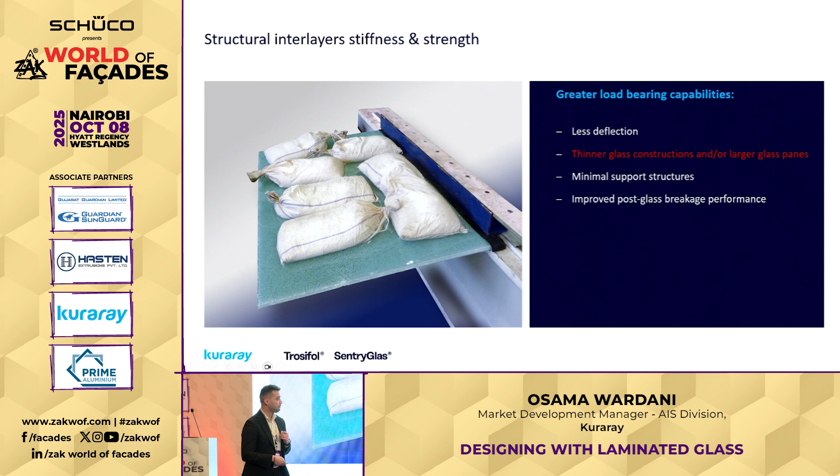For minimally supported structures, sometimes it's needed to keep the glass as light as possible, and reducing the glass thickness can help with that. And of course, the post-breakage performance is much stronger.

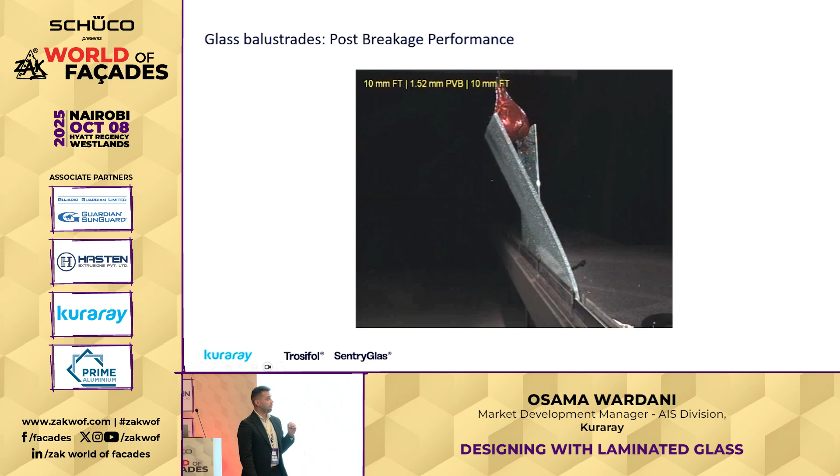The next one is done with PVB, 10-1.52-10 fully tempered glass. The PVB interlayer retains the broken pieces on itself, but it's still dangerous because the void is still in the system. So using PVB is about using it in the correct application.

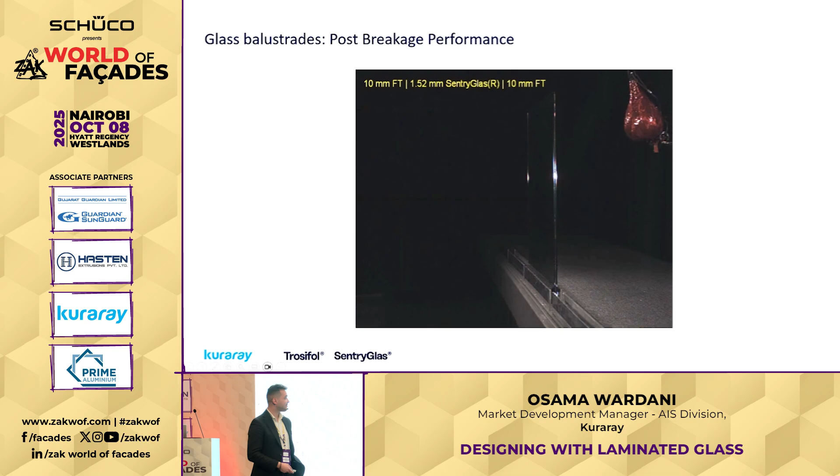The last one is done with SentryGlas, the structural interlayer, same glass combination. You feel that the glass is resisting the impact a bit, but it's actually the interlayer doing that. By no means am I saying keep it like this - you still have to replace it - but it buys you enough time to mitigate the risks of the broken glass.

Another extreme situation here, done by the University of Munich. Some students wanted to see the limitations of the whole thing. This is a 6 millimeter glass with SentryGlas at 50 degrees, which is something we work with a lot in the Middle East, where I come from. They broke the glass to test how strong the interlayer is and how much it would shear from the fixation points.

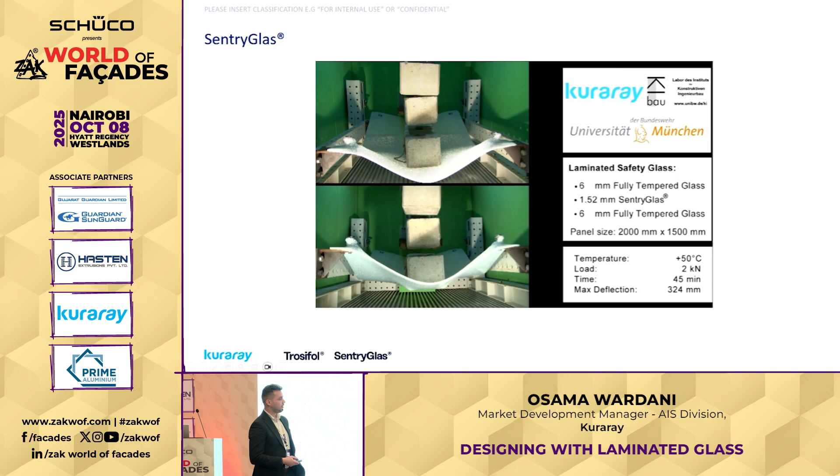So 1 kilonewton is already loaded, and this is where the students come with their crazy ideas - they started adding more and more. I'm sure in real life no one would dare walk on broken glass looking like this. Now 2 kilonewtons, I think they go up to 4 kilonewtons. Even here, look, it's still not touching the ground - but again, this is their work, the students.

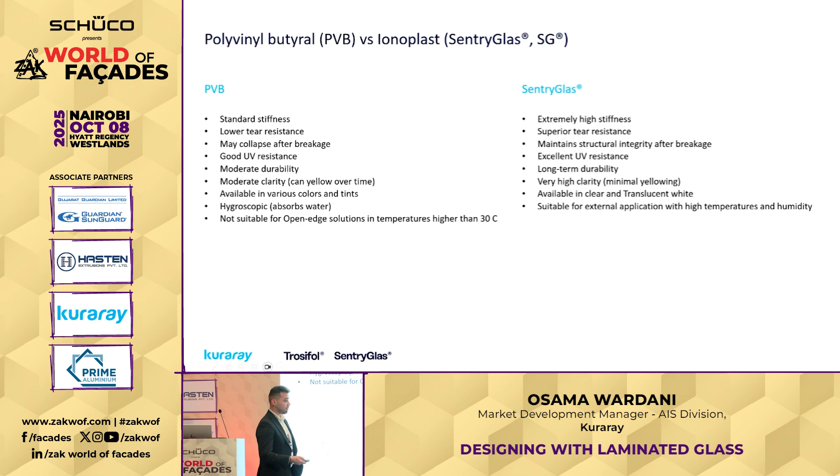Here's a generic comparison between them, I'm already out of time so I'll be quick. SentryGlas shows more superiority when it comes to stiffness, tear resistance, edge stability, yellowness, and everything. But there is also a big use for PVB - it just depends on the application and the temperatures it gets exposed to.

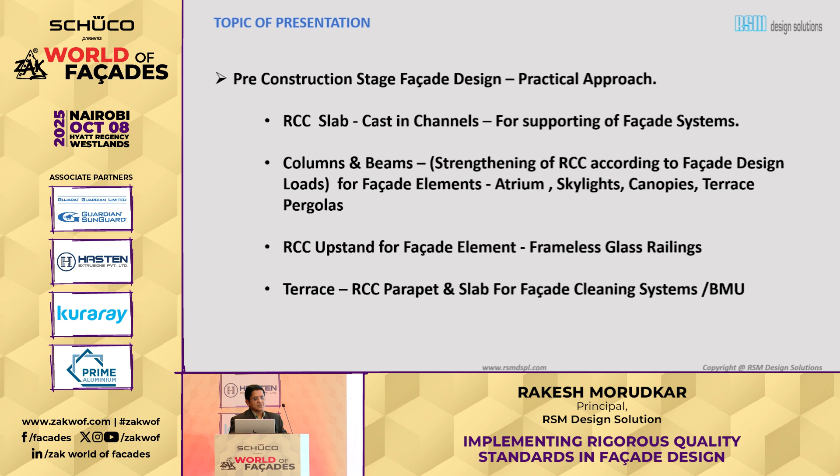In that, RCC slab cast-in channels for supporting the facade system, columns and beams, for strengthening the RCC according to the facade design loads for elements like atrium, skylights, canopies, and terrace pergolas. Then RCC upstands for facade elements like frameless glass railings, terrace RCC parapet, and slab for the facade cleaning system and BMU systems.

Today I had heard a lot of presentations where everyone was interested in showing how cost can be controlled. This is one part where I am going to highlight how things can be designed in the pre-stage condition, overall during the architectural and engineering process, in the beginning stage itself. This ensures not only the aesthetic point of view, but structural integrity and functional needs basically.

By starting facade designing early, adjustments can be more sensible and seamless, and potential conflicts can be addressed before they become problematic. So a thorough study of RCC conditions should be done before we start the facade design - use of cast-in channels, insert plates. In case of MS structure, it is better if it can be done in the factory, and then taken and installed as a bolting system so that there are no weldings on site.

The conclusion is that project cost control is achieved, and execution methodology and sequencing of the facade can be frozen to achieve the project targets.

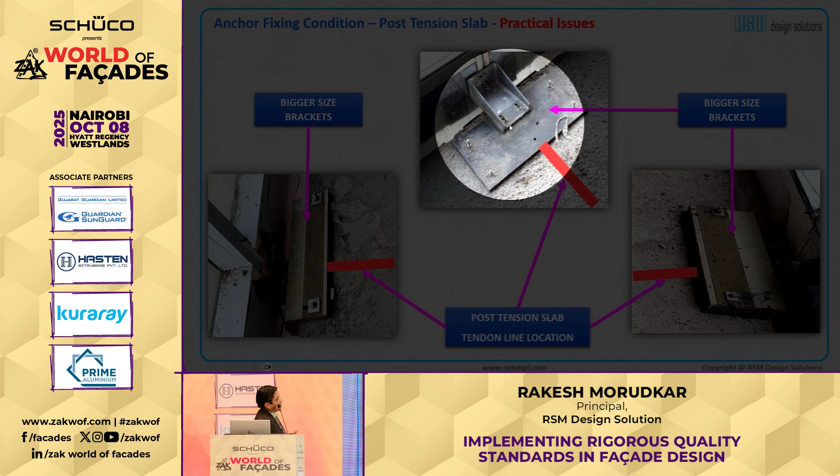Next are practical issues with post-tension slabs. If we don't consider this in the design, after construction there are variations in the bracket because the tendon lines foul at the bracket locations. This causes variation in the bracket. The solution for this is the cast-in channel.

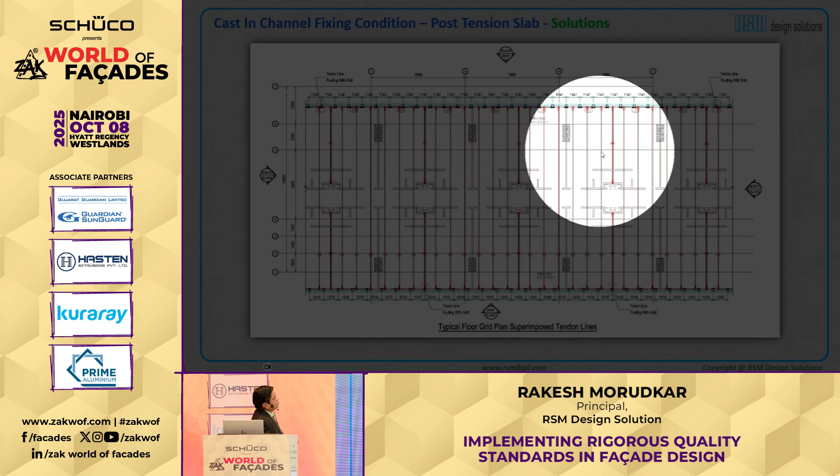This is a post-tension slab where, as I mentioned, we design the grid modulation, then superimpose the tendon lines. Wherever the tendon lines get fouled, we highlight that to the RCC consultant as well as the tendon line designers so it can be shifted during construction. This is the service we give, and later all the brackets can be a typical condition, which is where we save cost on the brackets.

Then our engineers go and verify the dimensions, checking whether it is as per the design we have given. Each and every slab is checked, and then for slab pouring we give the okay to proceed with construction.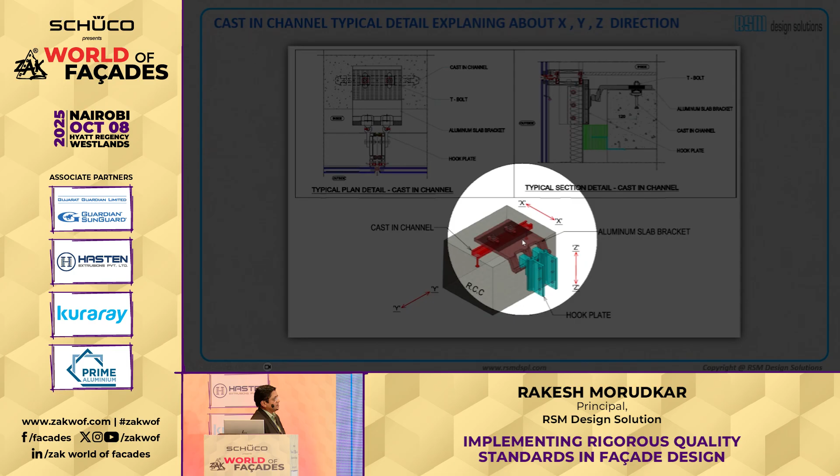This is the advantage of the cast in channel. We have XY direction movement from a tolerance point of view, and in the bracket which is holding the system, we have vertical tolerances. This makes ease of construction during execution time.

So this is the difference between SS316 and the cold roll casting channel. First, the edge distance, which is the main problem when designing with anchors, is pre-designed during the slab casting itself. Then certification: the anchor doesn't have green building certification, but with casting channels we can get green building certification. Man-hour spent is huge on anchoring, whereas in casting channel it is less. Flexibility: we don't have flexibility with the anchor, but high flexibility with casting channels. Safety: heating the rebar can damage PT tendon lines, but as casting channels are designed earlier, there is no such problem. Ease of installation: here we need electricity, there we don't require any electricity. So we have savings, especially savings on the brackets where we use casting channels.

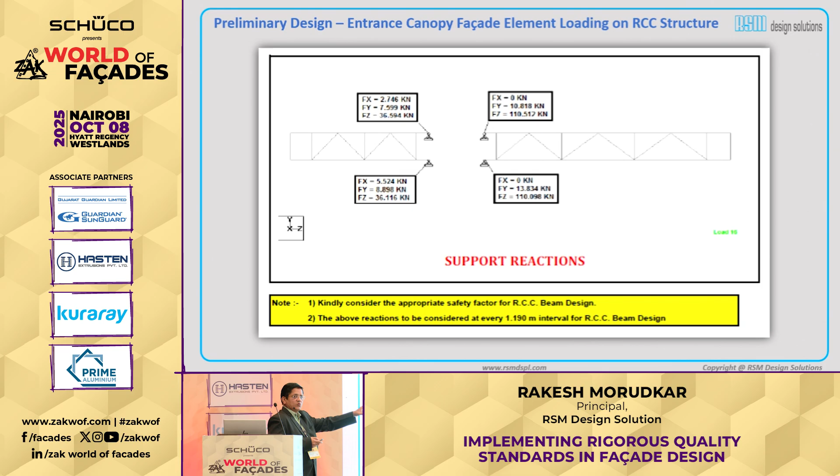Similarly, this is the atrium of 21 meters, which we pre-designed, and in this we had designed insert plates. These are the loads again given for the particular locations wherever the main supports are getting held up. This is how the insert plate designs are given.

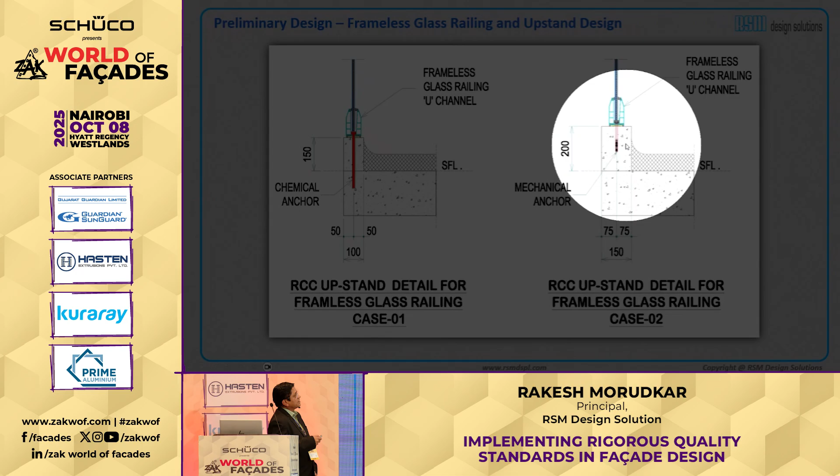Then there is a condition where we have a glass railing, frameless glass railing. These are the most common conditions where, when designing a glass railing, 100 by 150 mm will not work, because we have to go for a chemical anchor into the mother slab, which increases the cost. So it's better to design for at least 150 by 200 mm.

This is one example. I am giving a case study of our project AIGP IT Park in Kharadi, Pune, India. The client was CapitaLand, and the architect was DSP Design Associates from Pune.

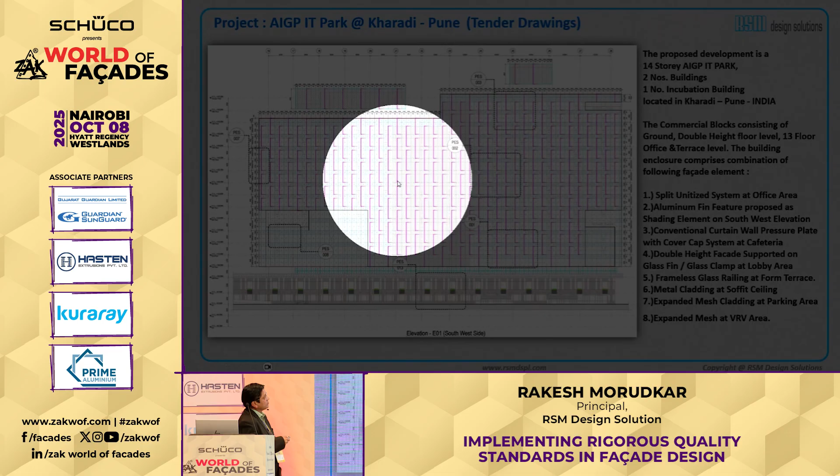So this is the element. The main thing in this project was the fin elements which were designed at the southwest area location for shading purposes. This magenta color you see is a fin thickness of 20mm by 500mm, jutting out from the glass line. This was the detailing we had done. You can see the location where the openable is, so we have to take care of the fin detailing, making sure the openable can open easily at this location. With that point of view, the fin design was done.

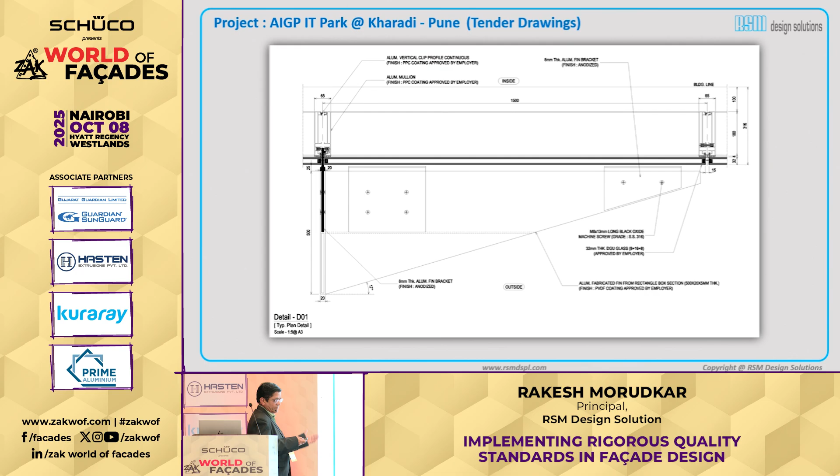You can see here in the plan detail, these are the tender drawings where we had done the concepts. We kept a gap of 26mm so that the openable could be easily opened in this way. And the bolt which was designed was a countersunk bolt matching the fin thickness. This is a seal detail.

Then there are some complicated locations where we identify the panel during the tender stage itself, so that when the fabricator is on board, he can easily measure it, and as per the site survey, he can fabricate the panel.

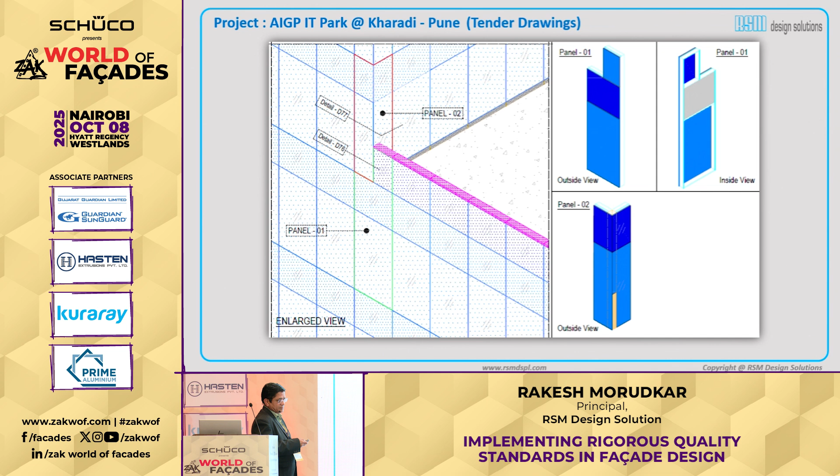So this was the fin detail. As I mentioned, the fin thickness was 20 mm by 500 mm. So we extruded this section in China, and you can see these two pieces. Again, this top and bottom piece was cut from a diagonal cut, so that wastage point of view was also considered. So this was the assembly.

So the green bracket you see is an aluminum bracket which is jutting out from the system, holding it at the first barrier location itself. This is again an aluminum extruded bracket, and this thickness was around 8 mm, and the fin was 20 mm. So it was inserted when the fin was fabricated and bolted to these brackets.

And again, just to point out, this gap was 25 mm which we kept from the glass line to the fin edge, basically, so that the lateral movement can take place.

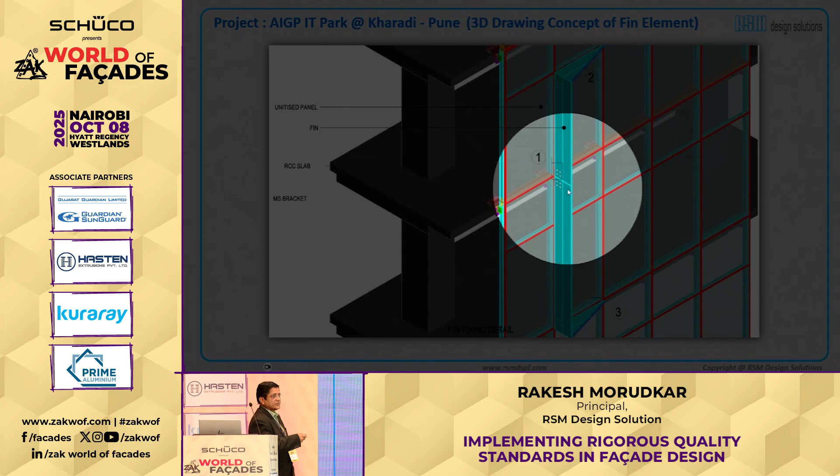So this was the actual fin. You can see this fin was separate because here we had a stack joint. So we had created an expansion joint here, and this L was different. So when you see the design, it is in an L shape. So this was the final shop drawings approved and done by the fabricator.

And the actual fin which we had made, we did the mock-up in China and checked whether it was properly done or not.

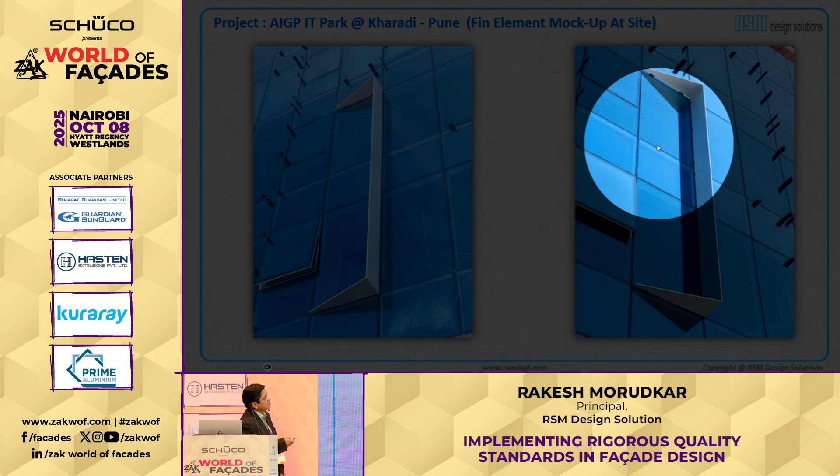And this is the actual fin which was fixed on site. So you can see the brackets which are jutting out. You cannot see any brackets in the fin, or bolting, or anything. You can see just a gap of 25 mm.

So as a design firm, a renowned facade consultant specialized in facade treatment, we serve developers, owners, architects, PMC, corporate clients, government firms and infrastructure. We have in-house consultancy engineering, and then BIM services. We design complex facades, do facade audits, peer reviews, retrofitting in design, facade lighting and BMU consultancy.

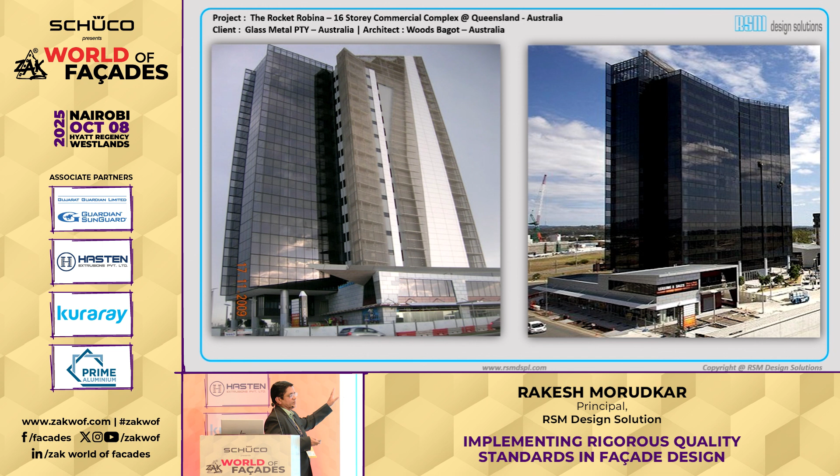This was our first project in 2009. We had done it in Queensland, Australia. So the engineering, we didn't have to go there or they come here. Everything was coordinated on email only. And this project was successfully done. My partner there was Glass Metal PTY in Australia.

Then in Nairobi we had given the service to CMAC consultant as a facade consultancy for this project, 316 Upper Hills. Also, we had given consultancy to Nairobi 88 for the windows, and there was a special structure on the terrace floor of the glass, basically.